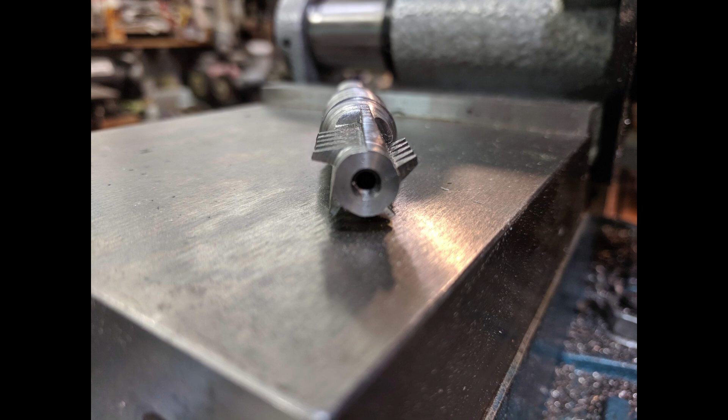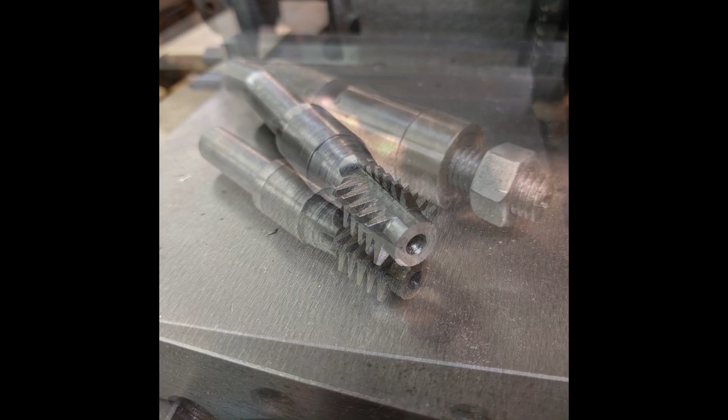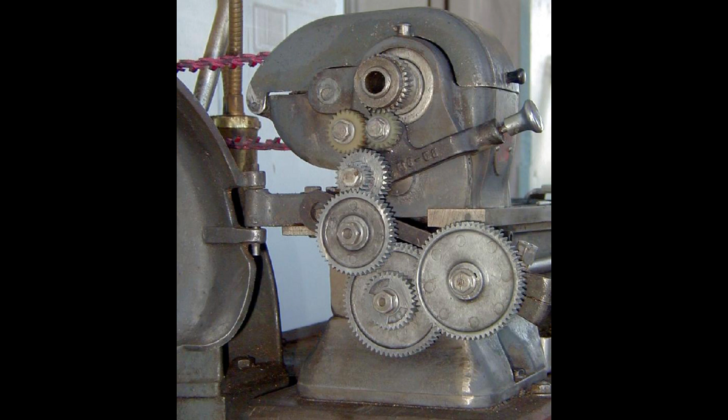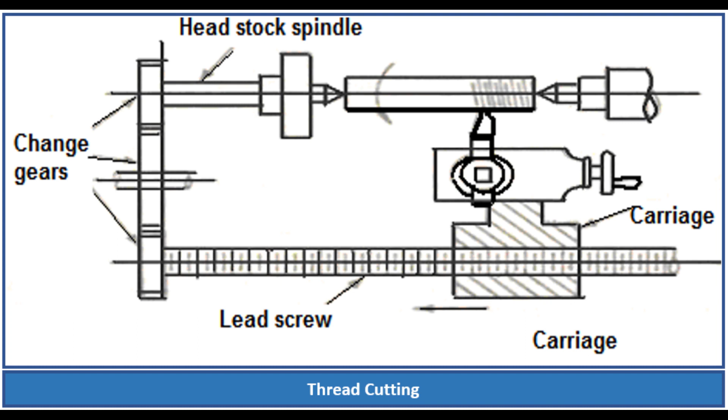This video is about cutting change gears for the Atlas 618 lathe. The Atlas 618 is a small benchtop home-use lathe that was sold from about 1936 until 1974. It uses a range of gears from 16 teeth up to 64 teeth in order to feed the carriage so that it can move while cutting threads into a piece of stock.

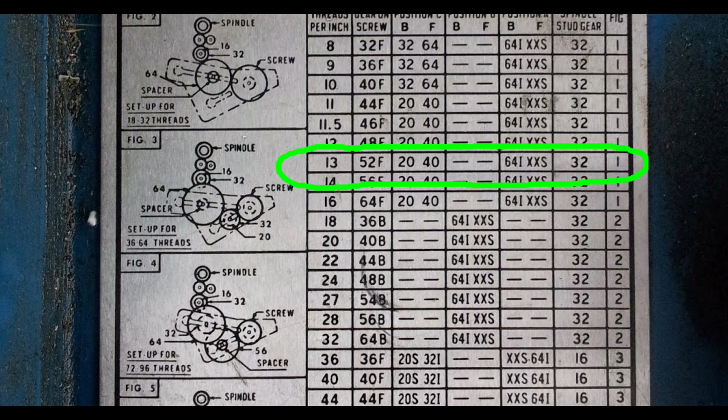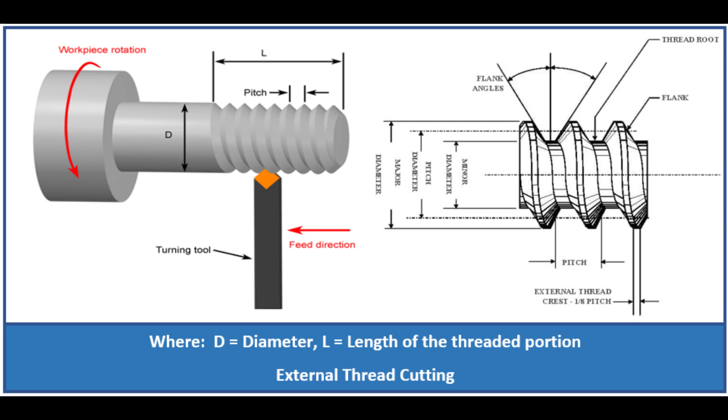For instance, using the chart, you could install a certain number of gears in a certain configuration so that the carriage will move at the rate of 13 turns per inch. Then if you turned a piece of stock down to a half inch, put a thread cutting bit in the carriage, it would cut threads on that half inch stock at the rate of 13 threads per inch, and you would have a half inch coarse bolt.

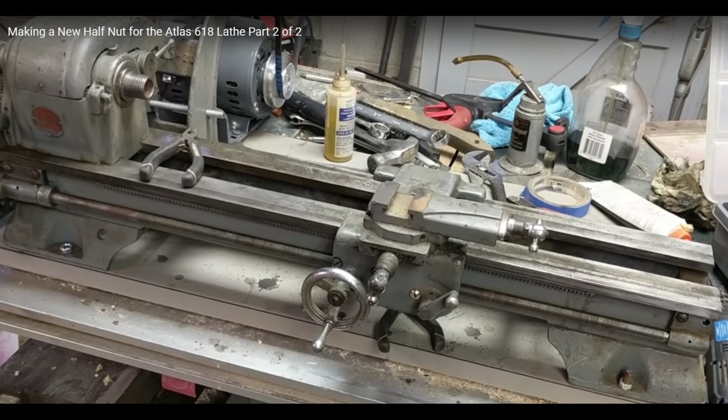This Atlas 618 lathe does not have any of its original change gears. I could go buy a set for something over $100, but what's the fun in that? So I'm going to make my own set of gears.

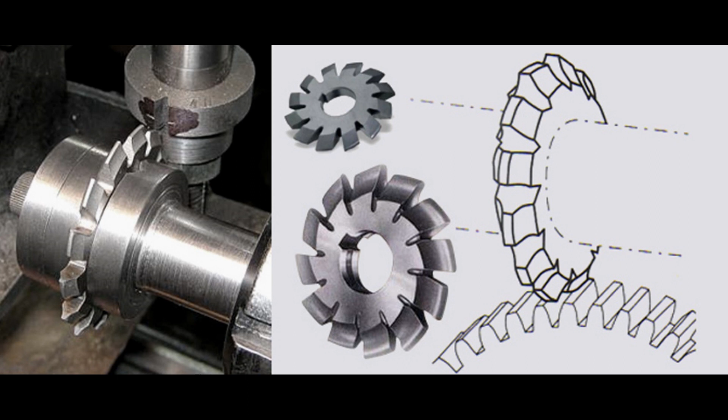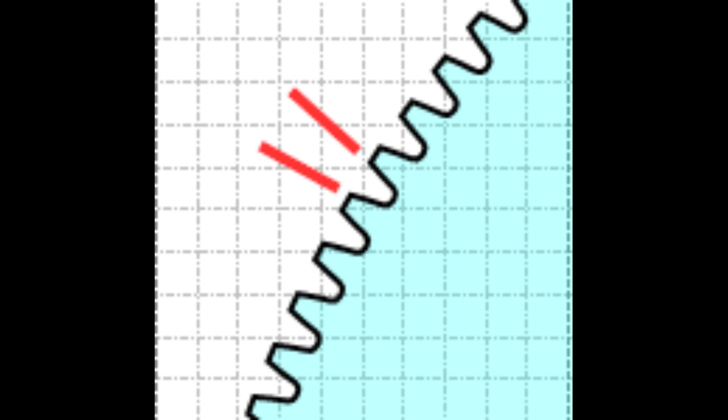As you may know from my previous video, I've made gears in the past. In the past, I used the traditional method, a numbered gear cutter that has the profile of the tooth groove for the size of gear that you're cutting. A gear with many teeth has a very narrow groove, and a gear with just a few teeth has a very wide open groove. So you have to use a different cutter for a different gear.

A full set of cutters is about $100. There's a problem though. Gear cutters are hard to find in 24 diametral pitch, which is the size of gears that I need to create. And secondly, I don't want to spend $100 — if I spent $100, I could just buy a set of change gears.

So I'm going to be trying a method that has a lot of promise, which is cutting gears using a gear cutting hob.

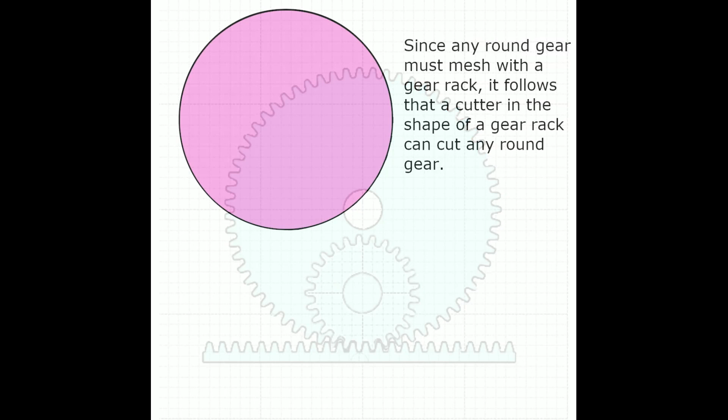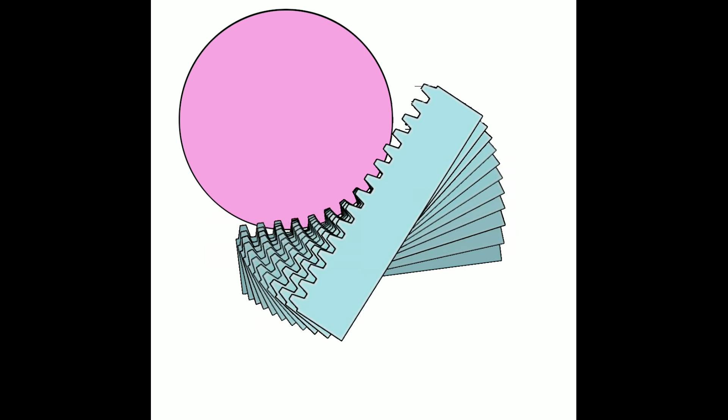Part of the definition of any gear, whether the gear is giant and has 500 teeth or whether the gear is very small and has only 9 teeth, is that it has to mesh with a gear rack. So it follows that if you could make a gear cutter that had the profile of a gear rack, that cutter could cut any size gear. That's what a gear hob does.

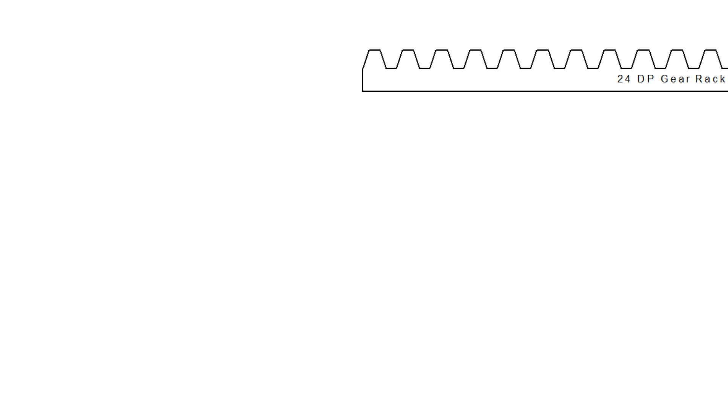So what we're going to be doing is mounting up a piece of tool steel in the lathe, and we are going to cut into that tool steel the profile of a 24 diametral pitch gear rack.

Because this is a 14.5 degree pressure angle gear, we'll be using a cutting bit that has been ground to a V shape of precisely 29 degrees. Now, using some trigonometry reveals how deep the cutter has to be plunged into the work in order to leave the exact spacing and gaps that a 24 diametral pitch gear rack would have.

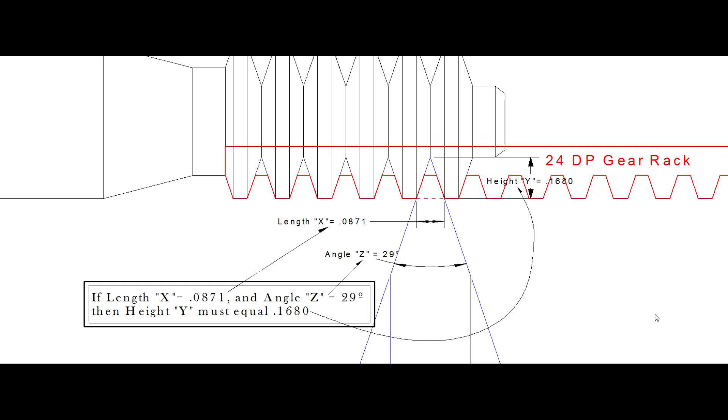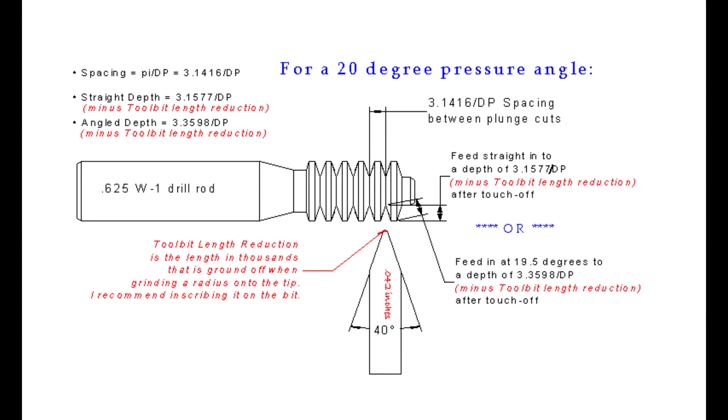It turns out that there is a reliable formula for a 14.5 degree pressure angle gear hob of exactly how far in to plunge the cutting bit. This page shows the formulas for a 20 degree pressure angle gear hob.

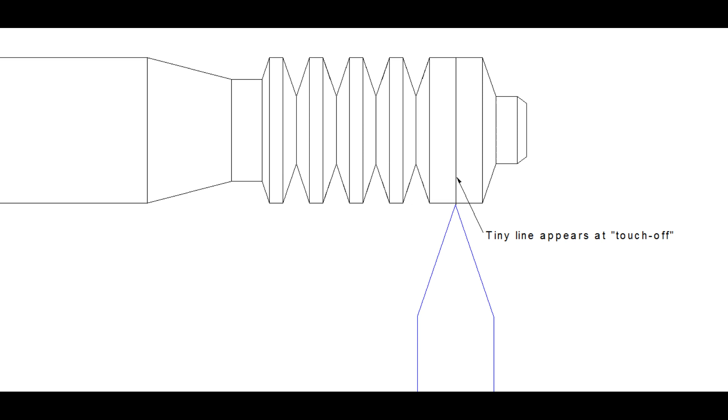One thing to note is that the only thing we can reliably measure when we are plunging this tool cutting bit into the tool steel is when we have initially touched the tool steel with the very tip of the cutting bit, and then we know from our feed dial exactly how far in we've traveled since that point.

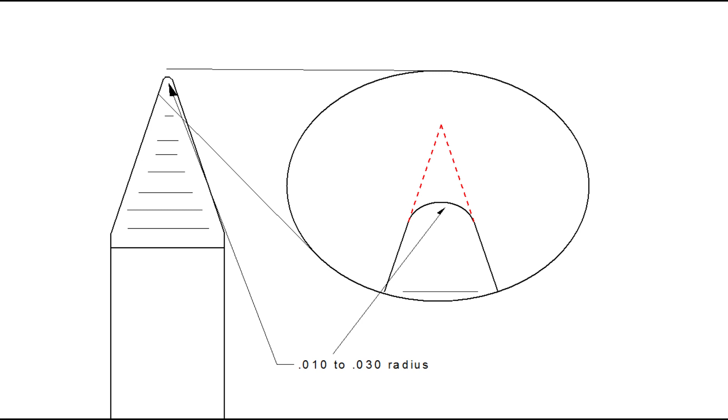But it should be noted that a cutting bit that is sharpened to a knife edge will simply bend or shear off or round over and be very difficult to cut. So for this reason, tool cutting bits have a 10 or 15 or 20 thousandths radius on the end of them so that the bit will stay sharper longer.

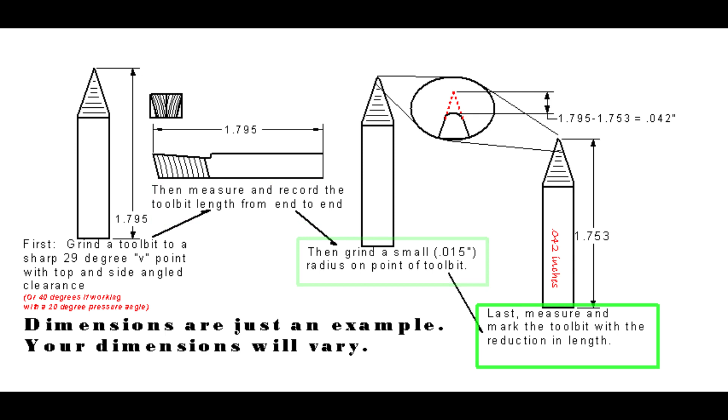But we need to know these calculations are only valid for the very point of the V. So what we can do to get around this is sharpen the tool cutting bit to a knife edge and then measure exactly how long it is. Then grind a small radius on the tool cutting bit and measure how much we have removed. This difference in length is simply taken into account when you're cutting.

So the bit I'm using is 42 thousandths — the length was reduced by 42 thousandths when I put a radius on the cutting bit. So when I plunge in the tool cutting bit, I will subtract the 42 thousandths from the total value that I am plunging in.

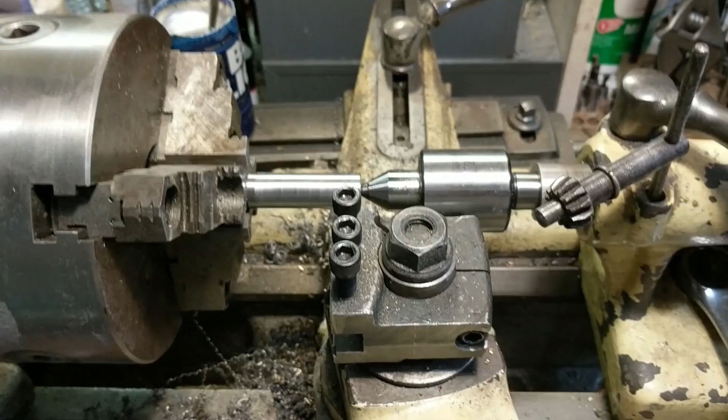Also note that the formulas are given either for a direct perpendicular cut into the side of the work, or an angled cut. I think the angled cut puts a little less load on the tip of the tool bit and produces a cleaner cut in the end. But whichever way you care to do it, you can use the formula to find the depth to which you should plunge your cutter.

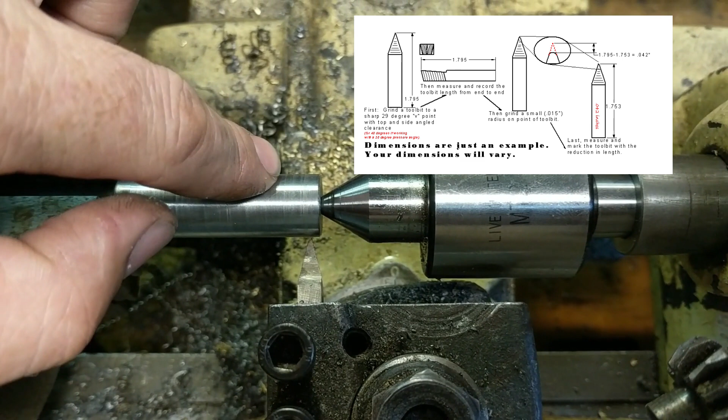Having turned down the 1/2 inch shank, I've flipped it around and skimmed this just enough to get it clean and round. Next, I'm going to be plunging in this form tool. It's a 29 degree, which is 2 times 14.5, tool that's going to be plunged in basically like a parting tool, and it's going to leave a 29 degree V groove.

I will do 5 or 6 grooves across here that are 0.1309 apart, and when I'm done, I should have the exact form of a gear rack.

So I've just brought it up until it touches off, and I have just set the scale on my dial to 0 because I'm going to be plunging 136 thousandths. So by starting at 0, it gives me a nice easy target all the way around to 0 and then back into 36.

Nice slow speed, in fact the slowest speed the lathe has. Plenty of oil, it's very much like a parting operation. 90 thousandths... alright, there's 105... 130... 136. There it is, groove number 1.

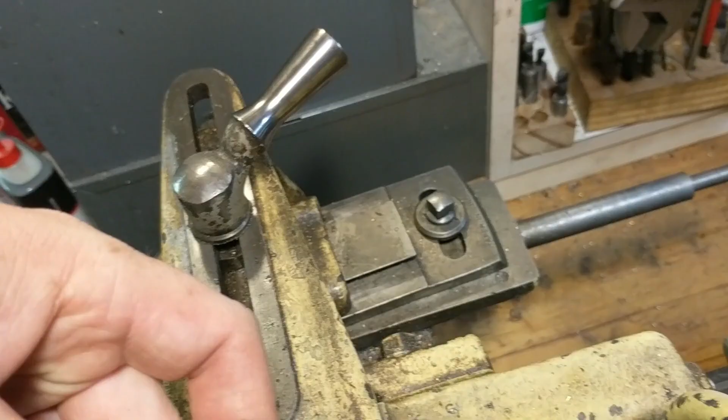5 more to go. Alright, so I've now cut 6 rings, that means I have 5 teeth, and those 5 teeth mate with this gear quite nicely. So here it is with the side clearance cut. The reason the side clearance is necessary is so that when you're cutting a larger gear, you're not striking the finished gear teeth as the gear rotates around.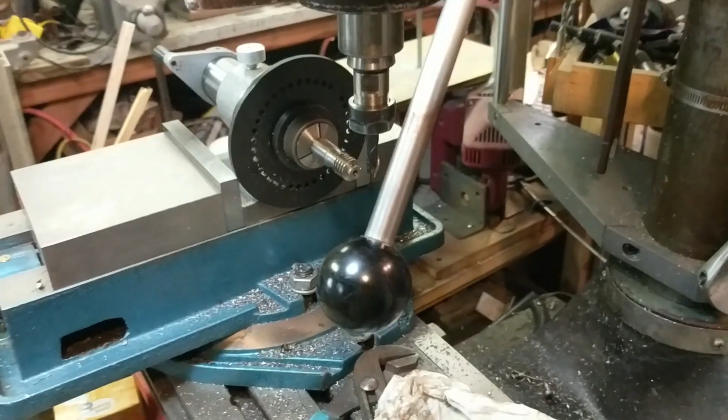I've got the cutter set up in the Spindexer. I'm going to be making 5 cuts. I've just finished the very first pass, and I don't know if you can tell, but it's a little bit past the center line, which will give a clearance angle. I'm going to be taking 5 slices out of this cutter, so it will have essentially 5 teeth.

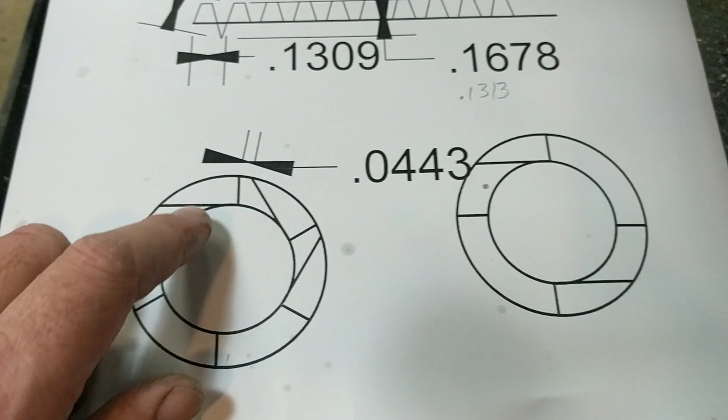I did a study here in CAD. On the right hand circle you see a study if I take 4 slices, and it leaves a big arc of uncut tooth area that I then have to grind clearance. 6 leaves only 44 thousandths of tooth clearance area, and that's if I get everything perfect in my setup. So I think 6 is too many slices, 4 is not enough, so we're going to do 5.

So on the Spindexer, it has 36 holes and 10 settings each, so the Spindexer can do 360 individual degrees. 360 divided by 5 turns out to be 72, so I need to move this Spindexer 7.2 notches in between.

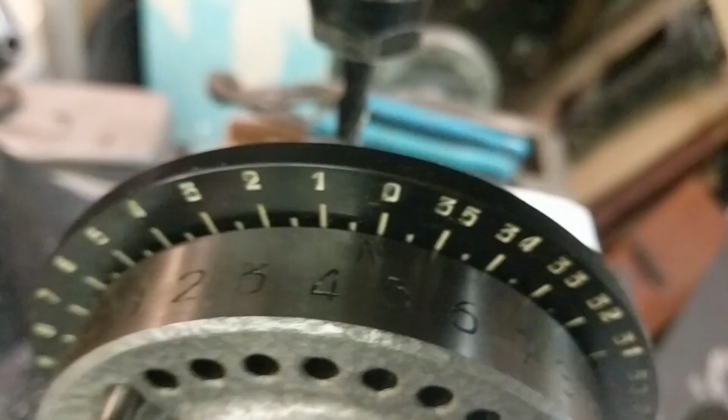So we're currently set on 0. I'm going to be moving it to put the pin in the 0.2. I'm going to be moving it to 7... move it to 7... and then just a smidgen past 7, the 0.2 engages. I'm ready to take my next cut.

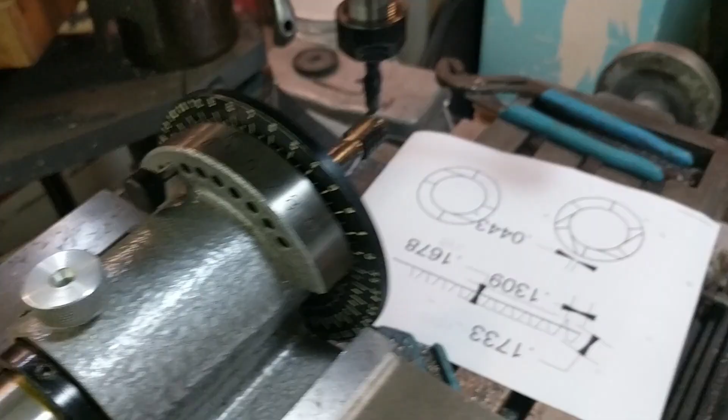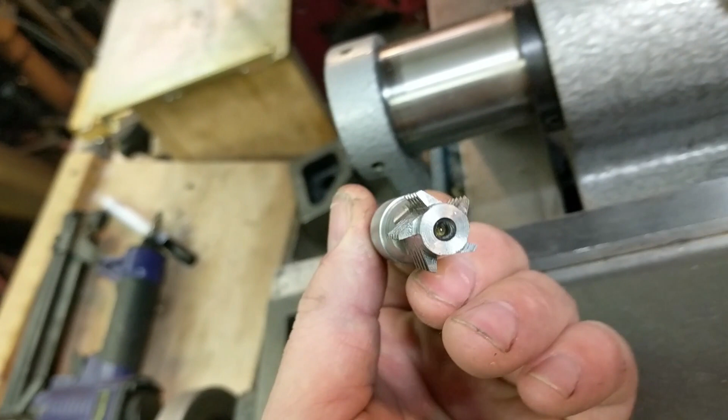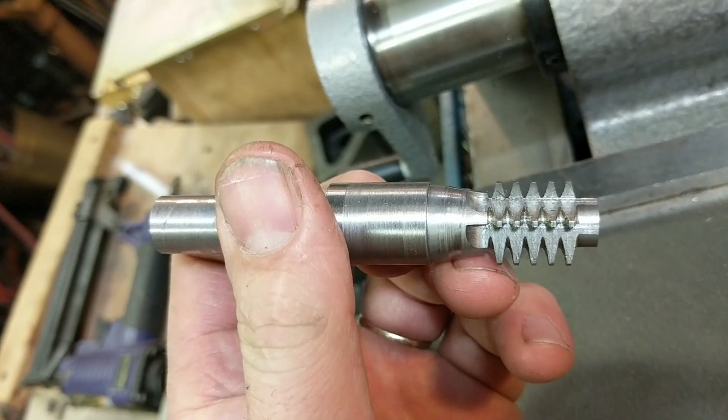All 5 flutes are cut. There it is after a deburr. So we've got a nice clearance angle on where those front teeth are coming across. Should cut a pretty clean gear as far as I can tell.

Now we have to clean it up to where we can see the color of the metal again instead of just the oxide that's on the surface. Once we can clean it up, then we'll heat it up to a light straw and quench it again, which will temper it.

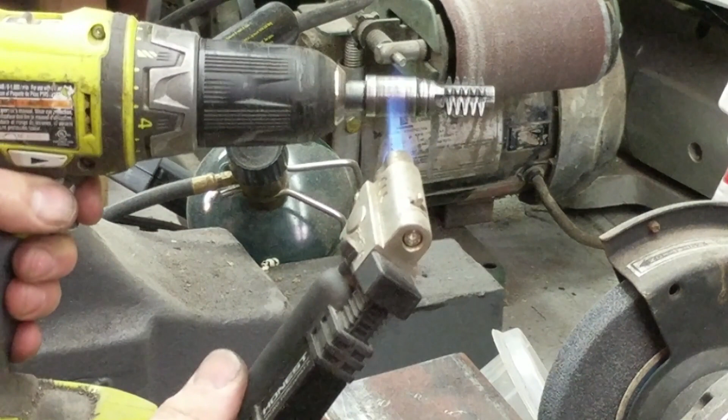Using this little butane torch because I want to apply the heat a lot more slowly, since it gets to the temperature I want kind of suddenly. Secondly, I'm heating this shank to begin with because it's going to be kind of a heat sink. These ends out here are going to heat up more rapidly, but I'm trying to anticipate where it's going to take the most heat and concentrate it there, then work it out to the ends.

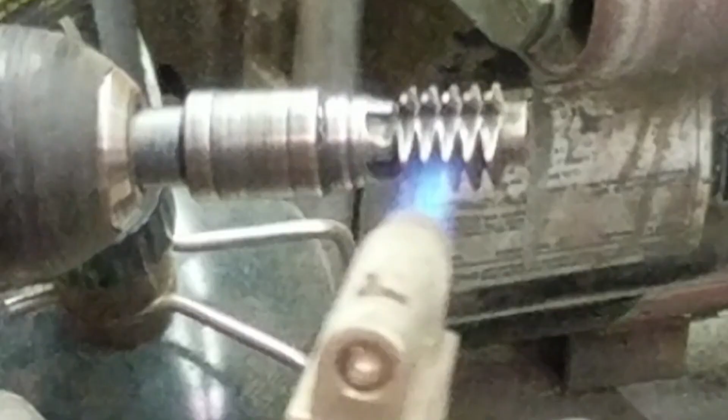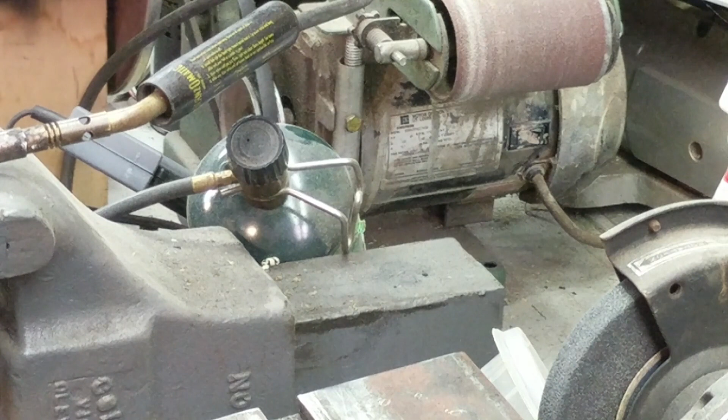I'm beginning to see just a little color. I don't know if you can perceive the color change or not. There it is, light straw. So it's now been hardened and tempered back. It's still very hard, but not so hard that it will shatter. Should now be a usable tool.